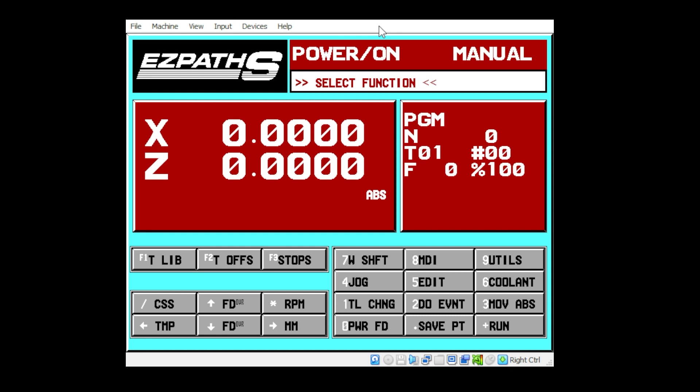Okay, so setting up tools in the EZPath software, you're going to go into the tool library and you're going to press the plus sign. And that's going to bring up a menu, and you have all these different types of tools that you can set up. Something important to notice is that there's a plus sign on all of these.

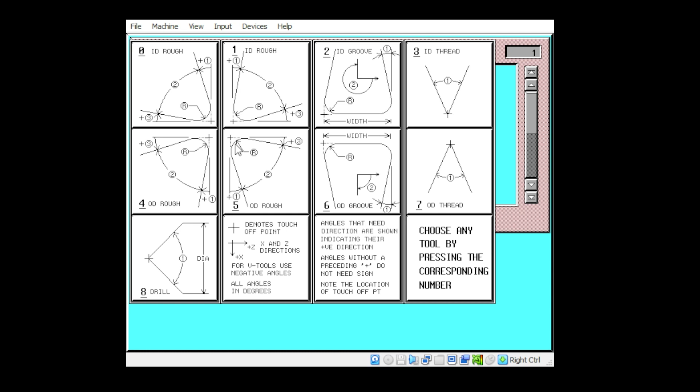Every single tool in this menu has a plus sign, and that plus sign is the control point. So every time when you're using a tool and your offset is active, that is the actual point that you're moving around. So for example, when we hit number 5 to set up a C insert, it's right there. That's where it's going to be. It's tangent to the radius of the tool, right?

So now if we're going to set this tool up, it's going to be tool number 1. It's an inch tool. Now the distance to X and Z touch off, that's going to be 0. That is not your tool offset. There's only very specific cases where you would want to put numbers in here, but 99 times out of 100, that's going to be 0.

Now setting up a C insert, it's going to have a 5-degree angle, and it's an 80-degree rhombus, and it's going to have a 15 thousandths tip radius. And that's it. That's how you set up a tool. It's very simple. Again, distance to touch off is not your offset. That is a different thing, and I'll demonstrate that right now.

If you hit F1, it will show you the tool. You can see that red plus sign, and that red plus sign is the control point. Now if I go back into this tool, if I hit the asterisk and then I go to distance to touch off and I hit, let's go 1/4 of an inch in X. Now when I view that tool again, you'll see that this changed by 1/4 of an inch.

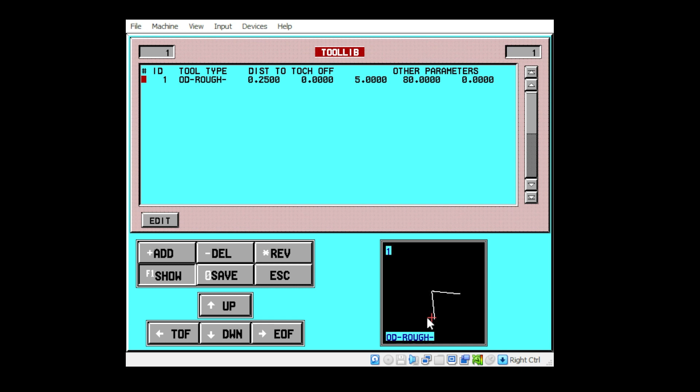The touch off point is now 1/4 of an inch behind the X. The tool is 250 thousandths forward of the touch off. So that is not your tool offset. That is an offset of the touch off point. And again, there's only very limited types of things that you'd ever need to put numbers in there. So that's pretty much always going to be 0.

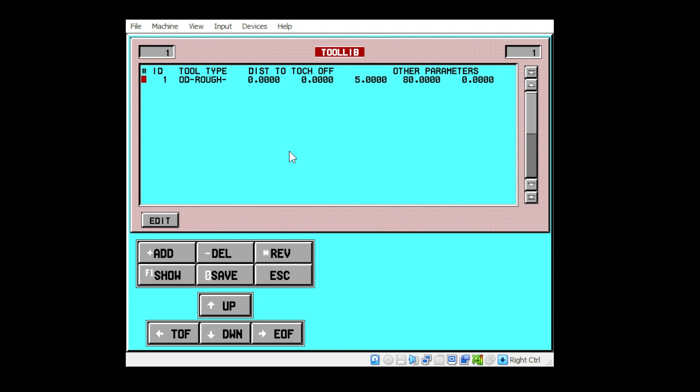Okay, so now if we wanted to set up another tool, we're going to set up a V insert, like a VCGX insert tool. So we're going to hit plus sign. It's going to be number 5. This is going to be tool number 2. Distance to touch off is both 0. Angle 1 is 5, and it's a 35-degree insert, and a tip radius of 15 thousandths.

So now if we view that tool, that's a V insert. And again, notice that it has that red plus sign. So it's very important to know that that red plus sign is your touch off point, and it's tangent to the radius of the tip of the tool.

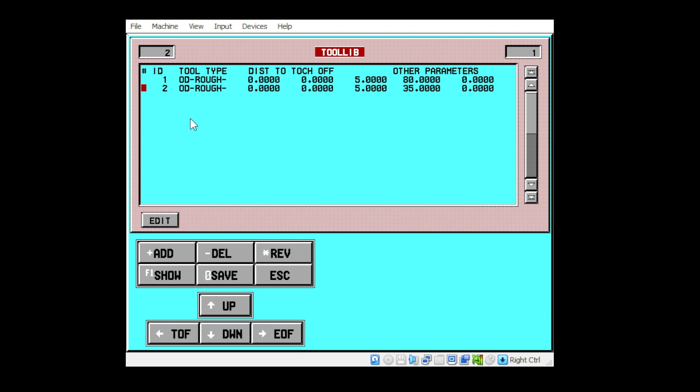Okay, so something very important I was pointing out in the tool library, the control point. If you look at this tool, let me just modify this so that it actually zooms in to where we can see it. Okay, so this is a CCGX 80-degree diamond, and it's in an impossibly small holder, but that's the only way that you can get it to zoom in far enough where you can see this detail. So it's very important that this black dot right here, that is the control point that Fusion is going to use to program this tool.

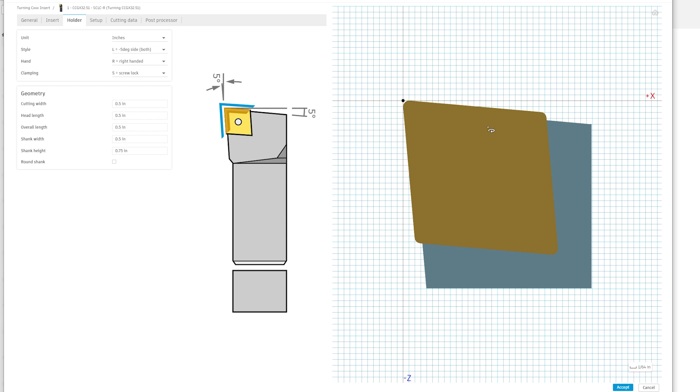So if you go to setup, under compensation, tip tangent, if you hover over that menu, you'll see that there's 4 options, and those 4 options will program very different tool paths to make the same tool make the same cut. So the way EZPath software works is it's this tip tangent. You must have your tools set up in Fusion 360 as tip tangent.

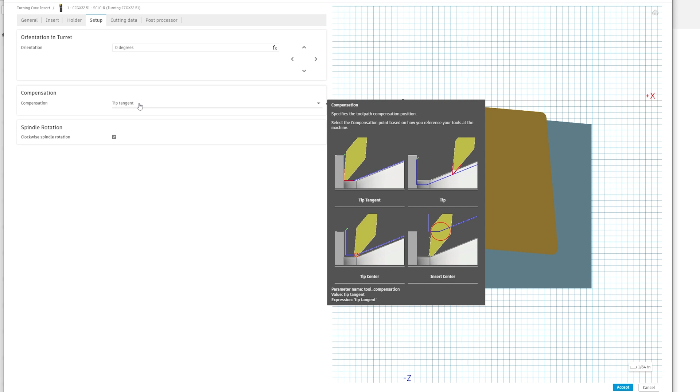And that's the only way that you'll get a toolpath out of Fusion that will actually cut the part that you're looking to cut. If you overlook this, you're going to be scratching your head trying to figure out why you're not getting the desired results. So now I can demonstrate this: if you take a look at this illustration, the black dot is tangent to these 2 edges. If you change this to tip center, now the control point is the center of the radius on the tool. So that's not going to be what you want.

So anytime you're going to use a CAM program, you have to make sure that you set your tools up properly, not only in the EZPath software, but in your CAM software, so that it outputs the correct path for your machine. Now I can accentuate this by going back to the insert and putting a really big radius on it. So I put a 1/16 radius on it. You'll see that these black lines are right tangent to the radius of the tool.

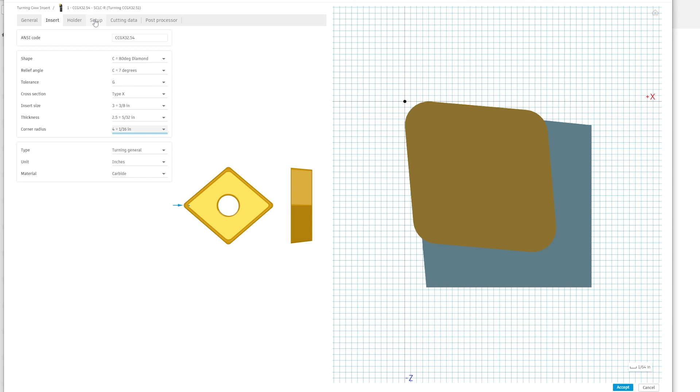So when you touch your tool off in X and your part comes up and touches this furthest most edge, that's your X. And then when you bring your tool up in Z and it touches this furthest most point, that's going to be your Z. So make sure, if you're using Fusion 360, Mastercam, whatever you're using, you go into the tool setup and you set the compensation to tip tangent. It's very important.

Now, another thing you really want to be mindful of is that you make sure that the radius that you programmed for the tool is correct for the actual tool, because the way that it's going to control the toolpath is based upon that radius. So if you have any chamfers or any radiuses on your part, it's going to need to know the radius of the tool. This way it can properly compensate for that radius as it makes it around that curve.

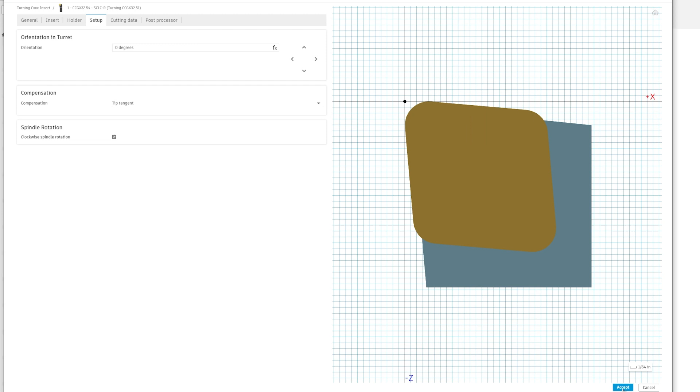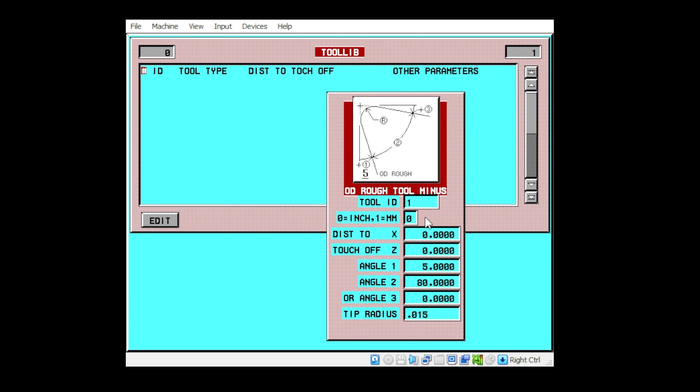And it's very important also in the EZPath software to make sure that you set the tip radius correctly, because anything that you program, if you program paths in the EZPath control, it's going to take that tip radius into account when you then do a roughing operation or a profile operation. It's going to use that tip radius to know where it needs to place the tool to go around a curved piece of geometry or a chamfer or anything that has any sort of shape to it.

It would seem logical to put a tool in the holder or the turret and touch it off to the workpiece and set our tool offsets. The machine would then know exactly where to position itself to get the tool to the desired position. However, then if we put a workpiece in the machine that has a different length, we must go back and reset all of our tool offsets to the new workpiece length. So this is the reason why we have the work shift function.

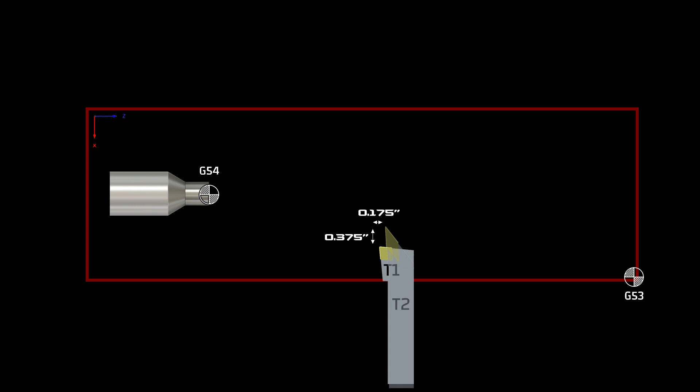So the way most people set these machines up is using the standard tool method. The standard tool method uses one standard tool to set your work coordinate. That tool would then have a tool offset of 0 in both X and Z, because that tool is what the work coordinate is based off of. The tool offsets are offsets from the work coordinate location, not the machine home position. Since tool 1 is the gauge that the work coordinate is based on, the tool offsets would follow the work coordinate when it's changed using the work shift.

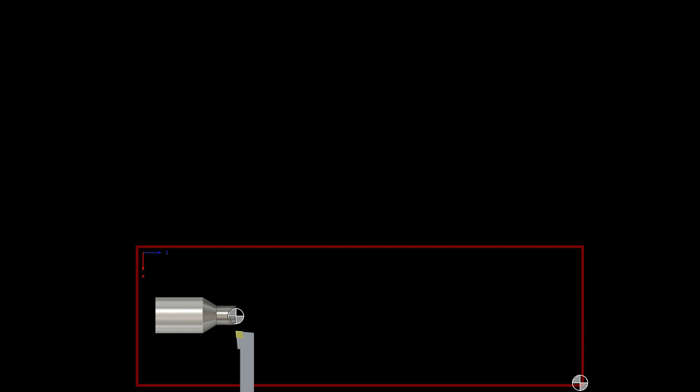It's important to note that the X-axis 0 is always the spindle center line. The only time you really need to set a diameter value in the work shift prompt is when you are setting your standard tool. To set your standard tool, first you need to determine what tool is a tool that you'll commonly use. For me, it's a C-style insert tool, as that's the most common tool I use. Using this tool as tool number 1, place a piece of scrap material on the spindle and turn the face of the part clean with that tool.

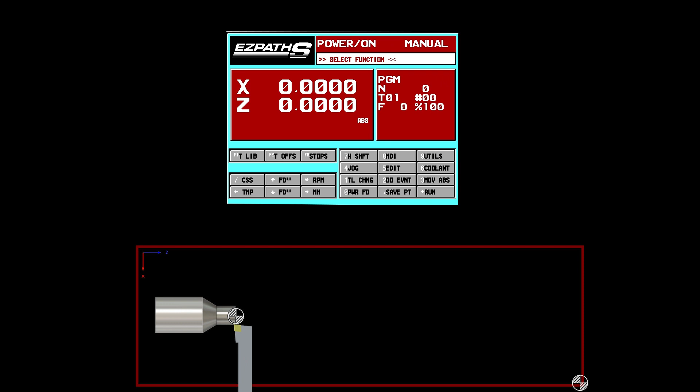Only back the tool off in the X-axis, press 7 for work shift and enter 0 in only the Z-axis box. Then you'll use the tool to turn a clean diameter on the piece of scrap, and only back the tool off in Z, press 7 and enter only the measured diameter into the diameter box. Tool number 1 is now set as your master tool and your work coordinate is set. The X0 point is the center line of the spindle and the Z0 point is the face of your piece of scrap.

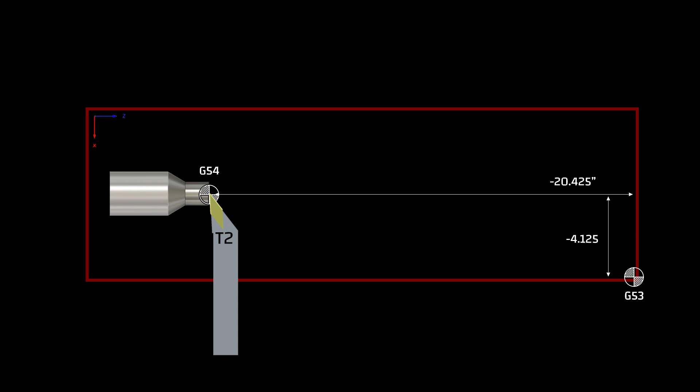Now load tool number 2 into the machine and press 1 to change tools and offsets to tool number 2 in the EZPath software. Once tool number 2 is in the machine, it's going to use offset number 2. Use a gauge block or a gauge pin to touch off the tool to the Z face of the part. Once you have it in position, press F2 to enter the tool offsets page. Press the Z button on the keypad and enter the value of the gauge block.

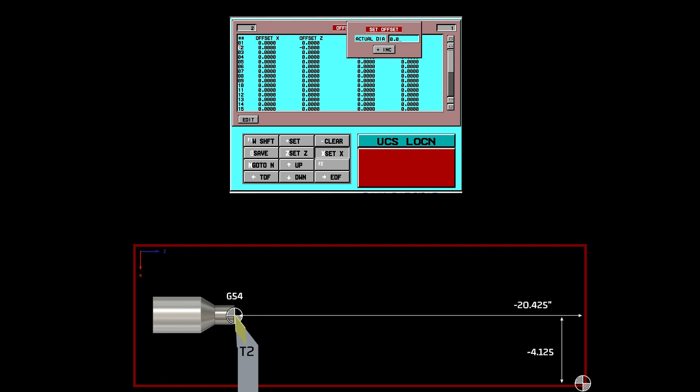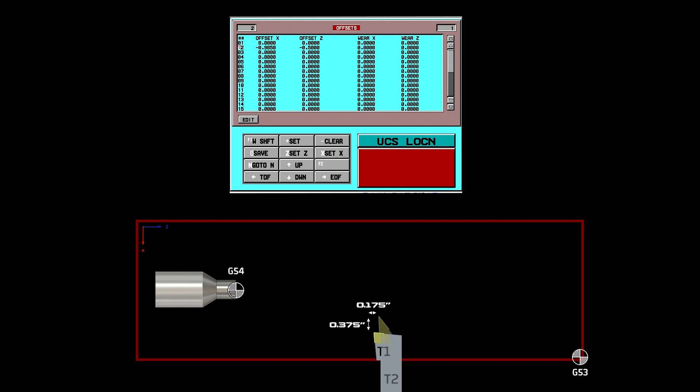Then use tool number 2 to turn a clean diameter on the piece of scrap. Back the tool off in only the Z axis. Press F2 to enter the tool offsets page and press X on the keypad. Enter the measured diameter into this X-axis actual diameter box. Now tool 1's offset is 0 and equal to the work coordinate, and tool 2's offset is the difference in dimension between the control point of tool number 1 and tool number 2.

Now when you work on a workpiece that has a longer Z length, you would use tool number 1 to touch off on only the Z face of the new workpiece, or the piece of stock that you're working on. With the tool in position, you would press 7 to enter work shift, and enter only the Z-axis value of 0 or the dimension of your gauge pin or block to set the new Z-axis work coordinate. Once you do that, tool 2's offset is offset from the work coordinate system, so all other tool offsets will change in Z according to the work shift.

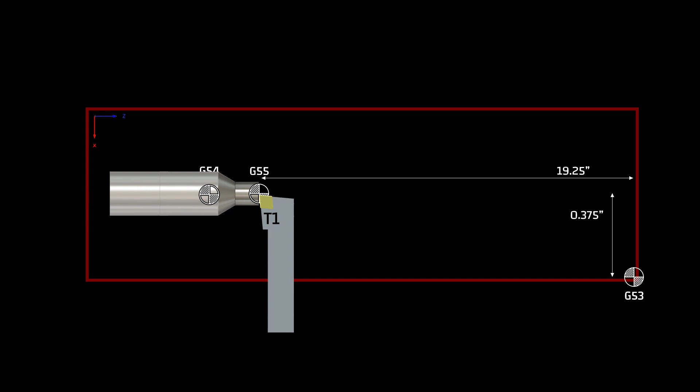And that's pretty much it. Once you have your tools set up in the tool library correctly, making sure that the tip radius matches the physical tool, and you have your tools correctly set up in your CAD and CAM software with the correct compensation of tip radius, when you output toolpaths from a program like Fusion 360, they should work correctly and have accurate results on the machine. I hope this was informative.